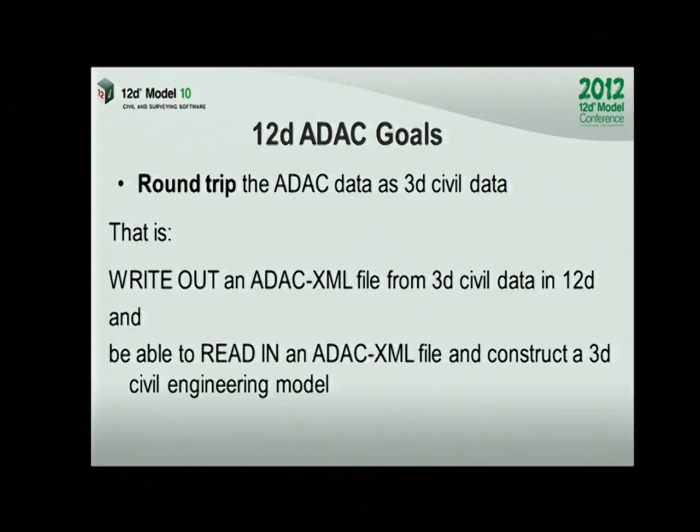Our whole aim from day one, and why we got involved with ADAC, is we want to make sure the data format could round trip 3D civil data. We just don't want to be able to write out an ADAC XML file, we want to be able to read it back in, say, to 12D and make something sensible out of it. That side was not really thought about too much because they were talking about just wanting to get our data into our GIS systems. We said, well, no, we would like to be able to build a network from it.

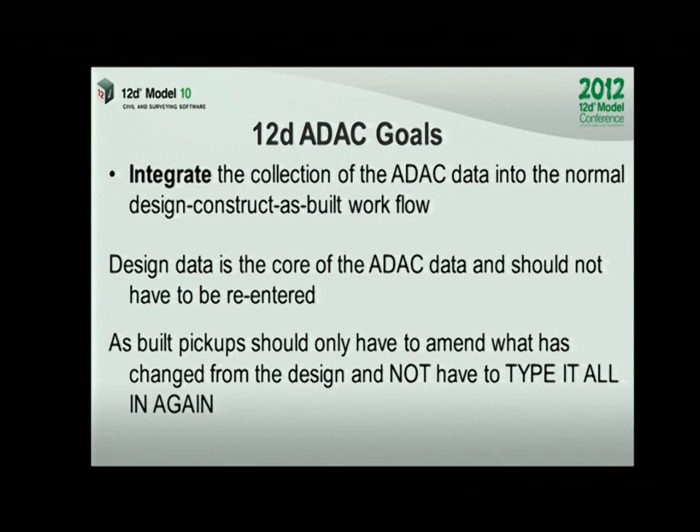Because my idea was, you give them all this ADAC data, then down the path you might be able to reuse it. So we wanted to integrate the collection of the ADAC data into the normal design, construct, as-built workflow, because most of the data in ADAC - your sewer network, your drainage network, potentially other things like footpaths - should already be in your design. And all that data, if it's in there, shouldn't have to be re-entered. The as-built pickups, well, you really should just be modifying the design. The only thing that should change, hopefully, is the coordinates of where the manhole might be, and a few things like that. But the rest should pretty well be the same, unless it's a total redesign - well, you'd have a new design anyway to pick up.

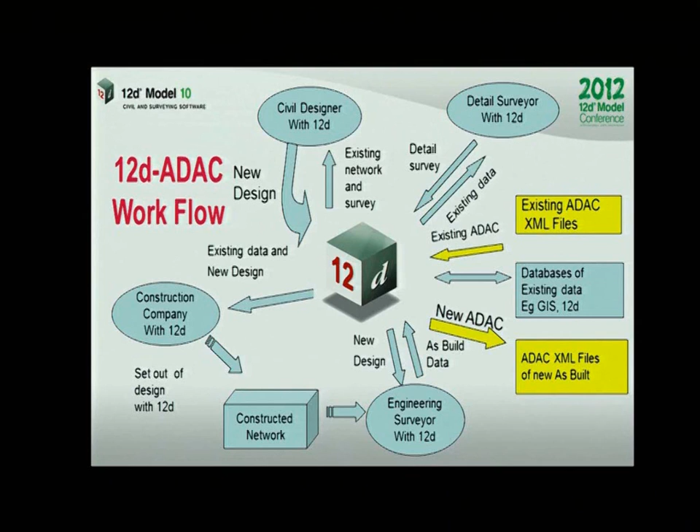We saw it not just as being able to read in the little writing an ADAC file out the side there, but we should be able to go to someone and say, for a council, I'm going to work in this area, give me all the past ADAC files that have been there for it, so I can read them in, and that should give me my as-constructed network of all that 3D data. You may have to add other things into it, surveys and so on, so the designer can use that ADAC data in the future as his previous ADAC data as the start. So that's how we saw it working.

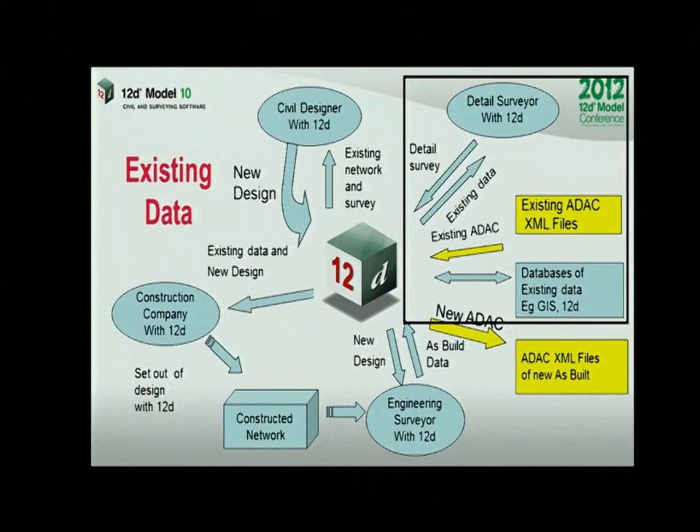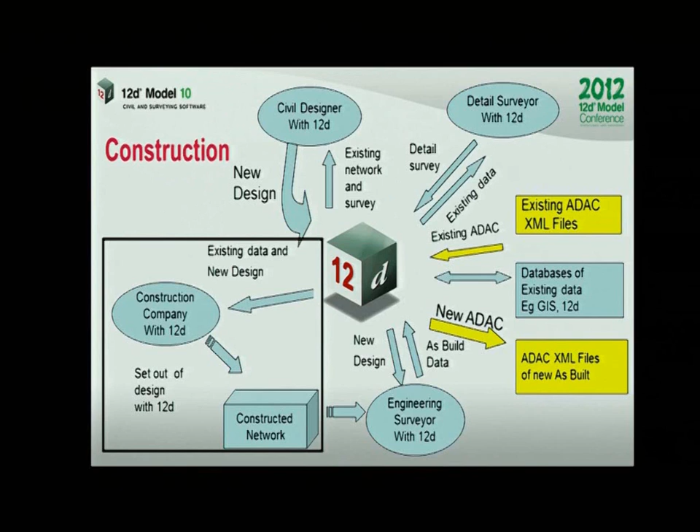You'd use the ADAC files coming out of your existing ADAC systems from the councils, pulling data from maybe GIS, go out and do detailed surveys, and that would be all part of what the designer works with. And so the designer would go away, put in his drainage networks, his sewer networks, his roads, whatever else he's designing. That would then go out to the construction company. You give him your 12D data to design, they would go out and construct it.

And then when it comes to the final stage where ADAC sort of comes in, the person picking up the as-built should have the design to start with. Because when you go out in the field to pick something up, if you've got the design, you can say, where is manhole A3497? And it should be able to guide you to where it is. If it's not where it's supposed to be, that's a good thing to say to start off with, there's an error. You go out and then do a reading, its coordinate would possibly be slightly different to what it was, so you would modify that.

But the type of pit, all that information, that should have not changed. If it has, they've built the wrong thing out there. So you really should be only having to go out there if you've got the design to double check what it is and modify a few coordinates and things. So that's how it should be working, we see, in the whole workflow.

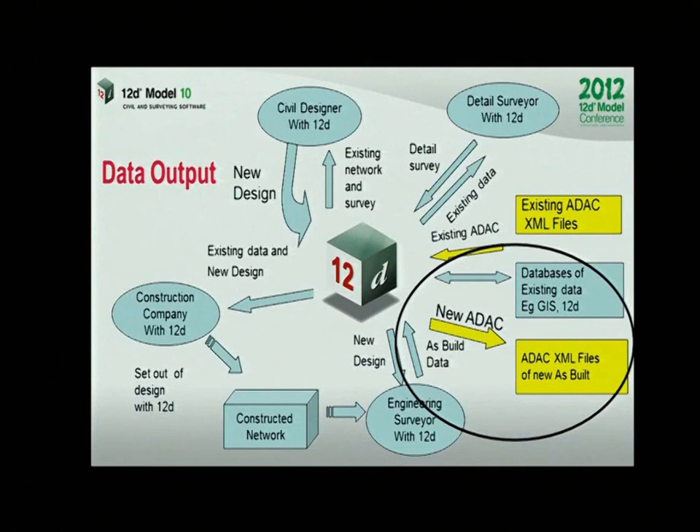Then the final step is there may be data in there that didn't come from the designers. There might be some asset numbers, other things. Yes, you might go and add some extra data to the ADAC. That's what's required. And then you write out your ADAC file. Or you would also have your data to go into your GIS system, or you'd have reports and everything else. So ADAC should be just one little part of this whole loop. And that's how we thought of it and how it should be working and what we've been working on.

So what we're actually doing, brave man I am, Alan Gray is going to demonstrate basically doing some of these processes, reading in the ADAC XML, the new version that came out just last year, to produce a drainage network, say in this case. You normally could then go and create 12D data or whatever. You know how to do that. We're not going to bother.

What we'll do though, we'll then just show you how all the ADAC data comes in, then into 12D with attributes and things. So you could add things, edit them inside 12D, or basically do whatever you want and then write out the ADAC XML. And then I think Alan reads it back in again. So just to show you can go around the loop. So we're just going to fire up and see how it goes.

Keep our fingers crossed. As mentioned, ADAC is XML. So as Hans said, there are already millions of different XML file formats out there. So ADAC have gone and created what's called the XSD or the schema definition, and that tells an application or a viewer or whatever how the data is structured within the XML file. So that's what XSD is all about. I'll come back and show why that's important in a second.

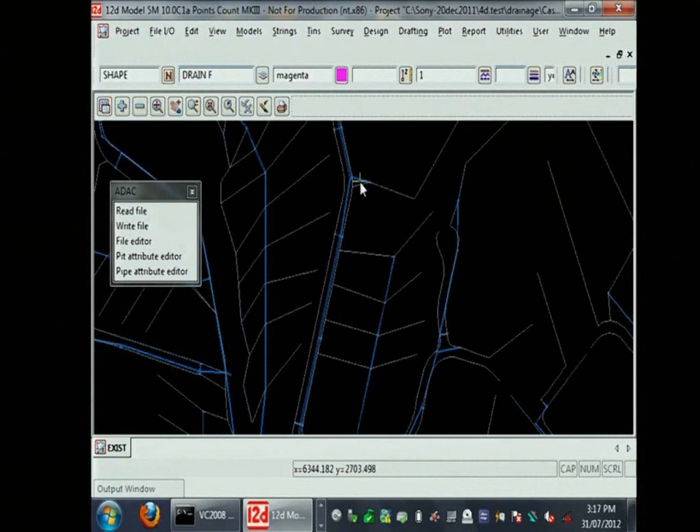But first off, we have a little project here which has a fair-sized drainage network, so if we zoom in far enough we can see our pits and pipes, etc. So our first little task is we're going to go...

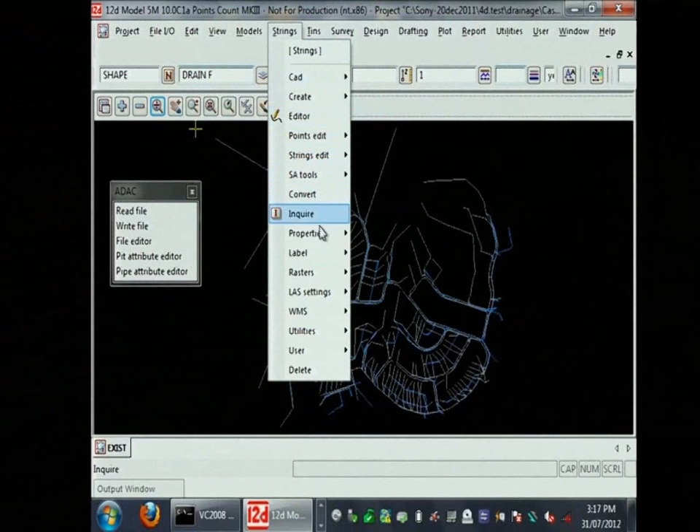Okay, actually, before you go anywhere, Alan, can you just check what are the attributes like on there at the moment? At the moment, there are no attributes, none whatsoever. So you just pop up a... Yep. So, see, this is why I always have troubles, because he just keeps wanting to vary my demo from what I've practiced. He never learns. The problem with the programmers is they usually don't know where the options are.

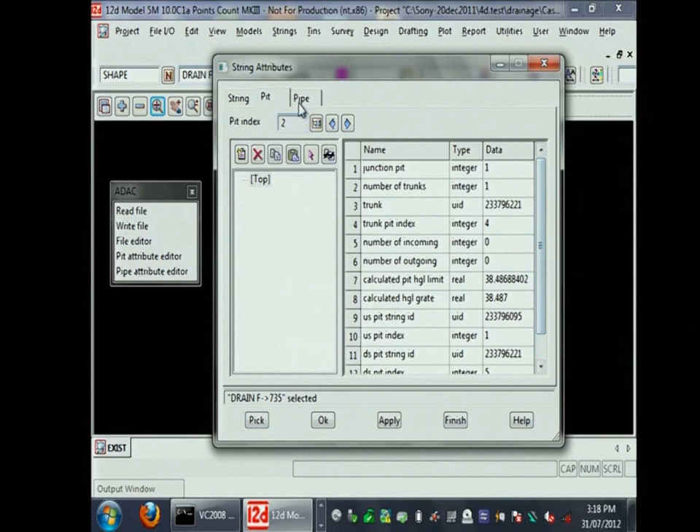Okay, so this drainage network has lots of 12D attributes, and on the pits, a lot of calculated attributes. So obviously someone has run probably a rational method analysis on this job. Now that's all the attributes it has.

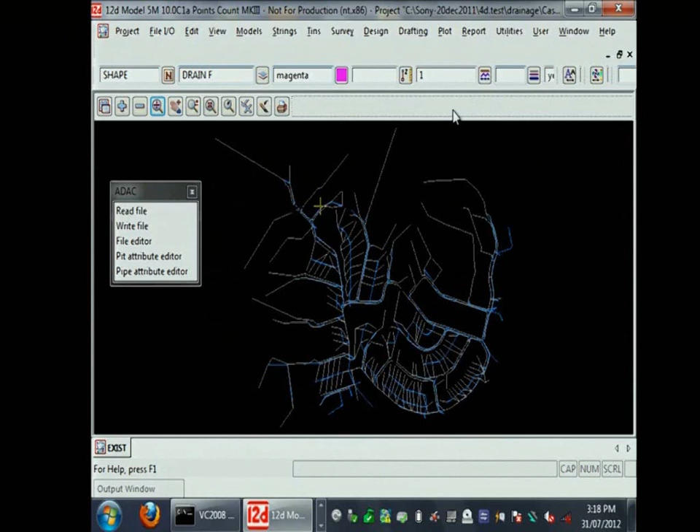Our philosophy with ADAC XML, and this will apply to other XML file definitions as they arise, is that we should be able to host that data inside 12D model as seamlessly as possible. We can read an ADAC XML file into 12D and it'll construct a drainage network with all the ADAC attributes there. We can rewrite an ADAC XML file and basically get the same file structure back. So you can transport ADAC XML via 12D ASCII or 12D XML, which is a bizarre concept, but that's the way it turns out.

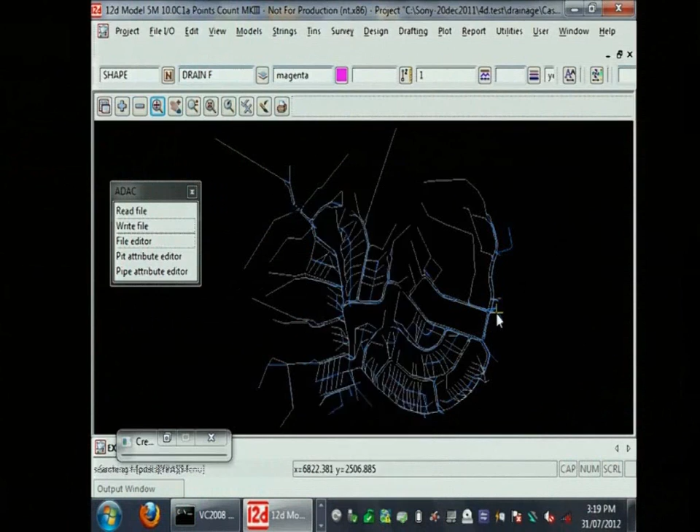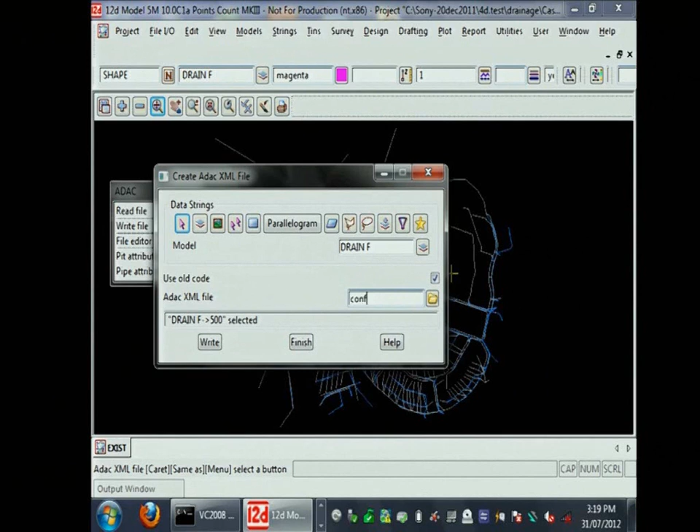So we're going to take the lazy man's approach. We're just going to export this drainage network. We have all the pit geometry, all of the pipe information, and with the drainage.4d file, enough information to automatically write an ADAC file. So we're going to write a file called conf 2012, and then try to open it. It's going to pop up in Internet Explorer, and I hope it doesn't hang this time, because Internet Explorer doesn't really like big XML files - it can sit there for 10 minutes consuming a 1 megabyte file. So if that's the benchmark we have to meet, we're quite happy that's Microsoft's benchmark for us.

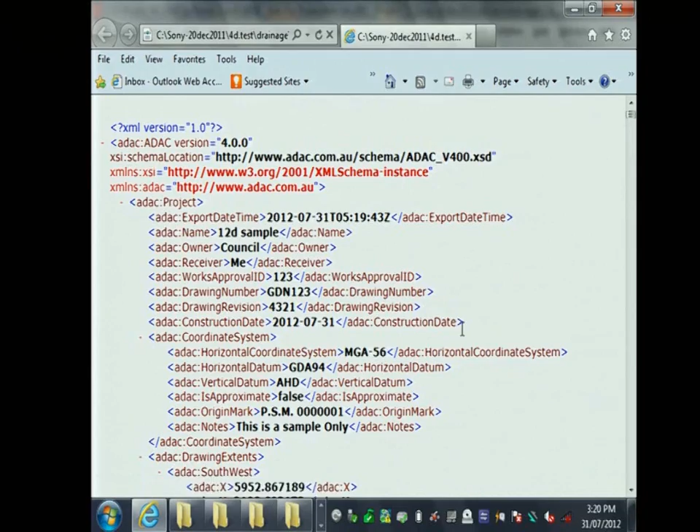So here you can see we have an ADAC file. At the top it says it's ADAC, and every element in there will have this ADAC prefix, and then there's a whole bunch of attributes about export time, coordinate systems, and then we get down to the interesting stuff of stormwater, pits and pipes. So that's running that file.

We're now going to dismiss that, and come back to read. We're going to say, okay, let's go and read back in that same conf 2012, and I want to read it into a model prefix called conf 2012 star. And it worked. It's alive, it's a miracle.

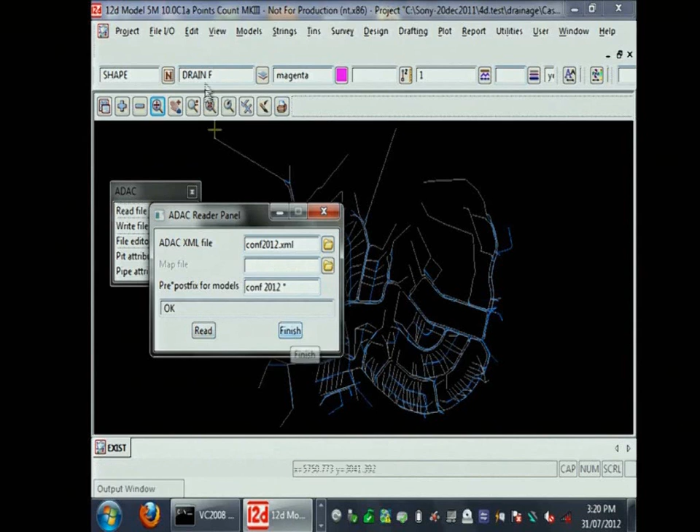We're going to add on conf 2012, toggle that text off, and maximize our view there, and if we jump between the two, do a fit so they line up, we should see that they probably overlap each other. Oh well, I've got other data on this view, so not exactly.

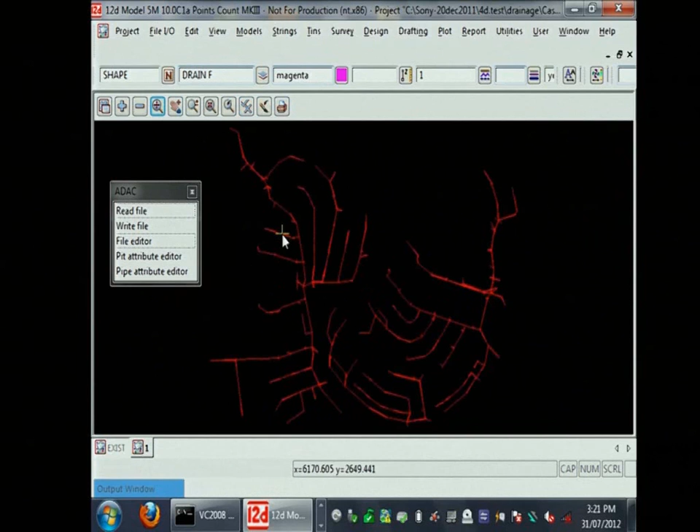So now, the question that Lee posed before was, okay, if we go back to attributes - vertices, section, pits, pipes, etc - and pick a pit and pipe, we now have this new subnode on the pit called ADAC. Inside that pit, it has every single attribute in exactly the same structure that exists inside the ADAC XML file. So this is where we're just preserving the ADAC or XML structure hosted inside 12D model, which gives us an awful lot of power, because as new elements or objects are added to the ADAC definition, and currently they're on 4.0, with 4.1 either soon or imminent...

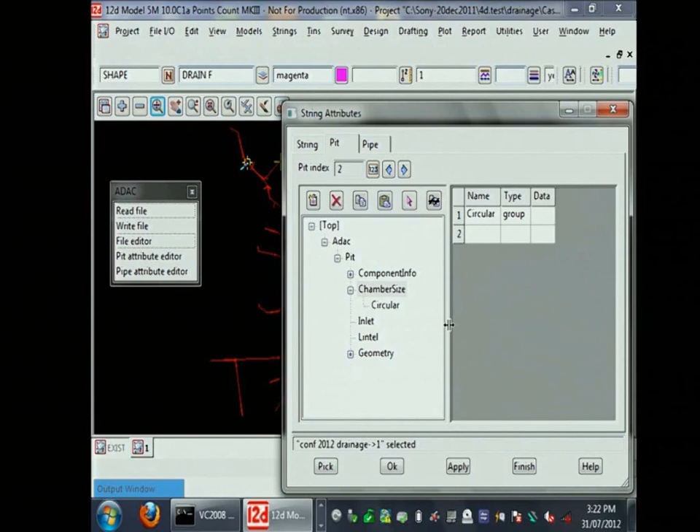That means our code should just work. We don't have to keep modifying 12d.exe every time they change something. That's the theory, and it hopefully will be proved to be true. And again, for the pipes, we've got various attributes - you can see they've got their object ID, their component info, all that sort of information.

And here, for example, they've got this concrete cover type, and it's standard. Now, in this form, that attribute is just text, so it doesn't know what are all the choices for the concrete cover type. Is it standard? What are all the choices? So what we did go and do is, because we've decided to...

Use XML so extensively in 12D model now, we decided we would go and write our own XSD engine. So what that means is an XSD file is just another XML file - it's kind of a recursive definition. But XSD tells us all sorts of interesting things.

So for example, if we go and read that conf 2012 file, we now have that file in an editor which is actually editing the ADAC XML file in its structure using the ADAC XSD definition supplied by IPWEAQ. So what that means is...

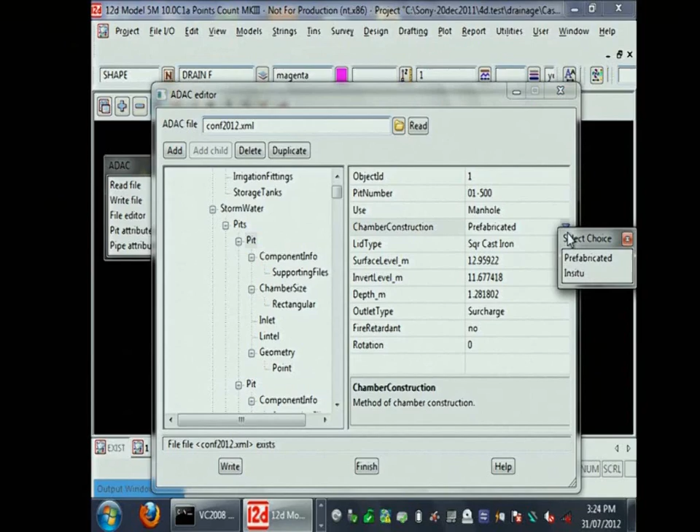So if the 4.1 definition comes out with an additional choice, we are using the XSD file to drive an editor inside 12D to allow the user to edit an ADAC XML file. It doesn't have to be ADAC XML - it can actually technically be any XML file that has a schema available. This generic editor will allow you to edit that XML file in a more intelligent fashion.

So it'll know, for example, that under pits you can add a new child, and that child will only be another pit. So under pits you're only allowed to have 0 or more pit elements. So yes, as far as XML goes, we've really gone to town trying to implement the ADAC implementation in the most generic fashion possible.

So if we go and click on our pit editor - how are we going for time, Lee? You're okay, you confuse people enough. You'll be right, that's good. Well, if I confuse them, they won't ask questions, etc.

So here we are, we're actually using an ADAC pit editor. We've gone and selected a specific pit within our drainage string. It knows where all those attributes should be hosted within the attribute structure of the drainage string manhole or pit. So we can come in here and now intelligently edit the data - we can say this data was owned by council.

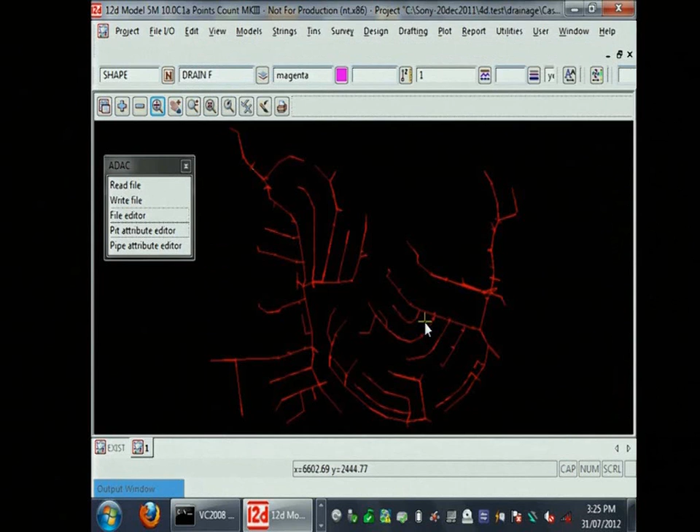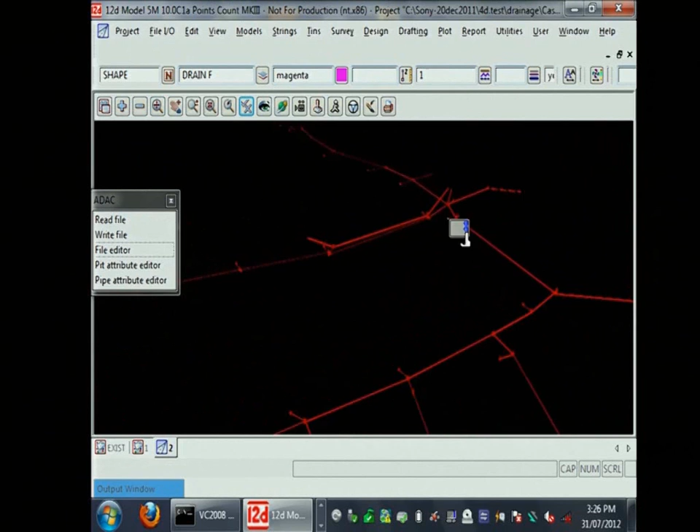So for us, that's ADAC in a nutshell. When we read that data in, we can go to a perspective view, and I'll go and add on - sorry, I'm running at really low resolution here because of the syncing problem - and just toggle shade on. We'll just mouse into this section of the network, that's a much nicer area up there. I'm just using the touchpad, and just to make my life more difficult.

And so that's the actual network itself. So that's what ADAC in a nutshell is for us - we've gone and done the most generic implementation necessary to support not only ADAC but other XML definitions or even different variations of ADAC, so that we don't have to keep changing the source code of 12D model every time a new ADAC definition comes out. The theory is that the existing version of 12D should work. Now if they go and completely rearrange everything and turn the structure inside out and upside down, then that could be a case of all bets are off, and then you have to go and revisit the definition.

So is there anything else I've missed there, Lee? Other than that, when we say we read the ADAC file, you actually could use this ADAC editor and the schema to just pull it up and type every bit of information in there. You don't have to have your drainage network, but that would be very laborious and not using information you've got. And the part we've done - yes, we've got all the ADAC attributes, but what we've done then is interpret them graphically. ADAC does not tell us, or XML does not tell us, how to draw a pit, or that this is a pipe.

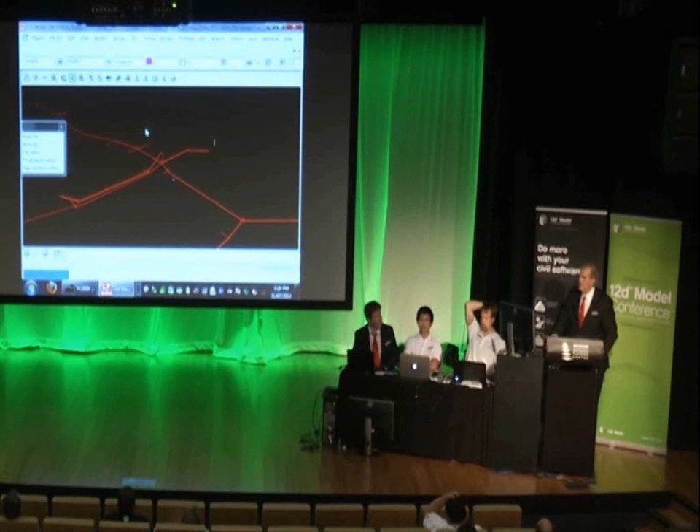But in theory, yep, the editor would just pick up - you could type everything in from scratch, because the file format for the ADAC file controls all that and tells you what you can put in there and away you go. But yeah, now the problem with the ADAC is, well, that's what we'll be doing now. Now we've got 10 out, we had to add a lot of things for version 10 before we could finish the ADAC off.

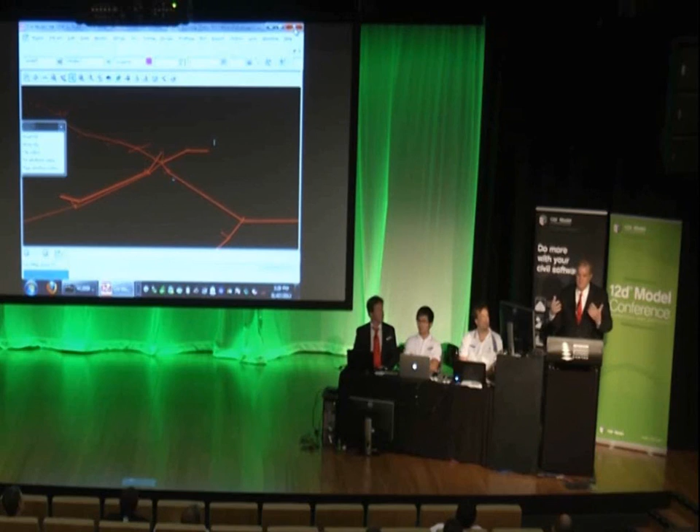So we're now working on this in our 11 and working with beta people, because before we had to have rectangular pits, we had to have thicknesses, wall thicknesses. Your pipes just can't go to the centre, so we have to have connection points and things we were shown in version 10 in the drainage section. We needed all those things in there before we could totally implement the ADAC.

And some of the things in the ADAC are not necessarily quite correct - where they might position things, they might be worried. Some of these systems work out grades that are different to what you might measure in the field. So we just have to worry about those things as well, but we can go as far as we can.